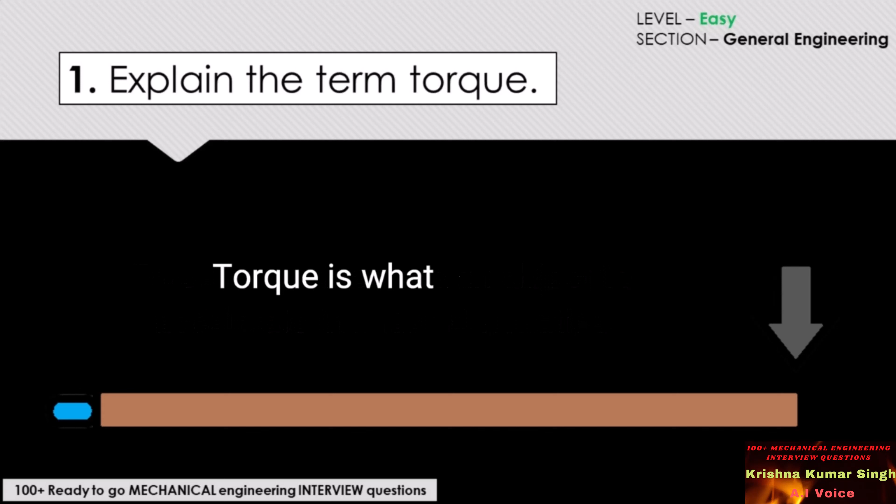Explain the term torque. Torque is the measure of the force that can cause an object to rotate about an axis. Force is what causes an object to accelerate in linear kinematics. Similarly, torque is what causes an angular acceleration. Hence, torque can be defined as the rotational equivalent of linear force.

The perfect answer for this particular question would be: a force that causes rotation is called torque. It is a measure of how much force is required to rotate an object.

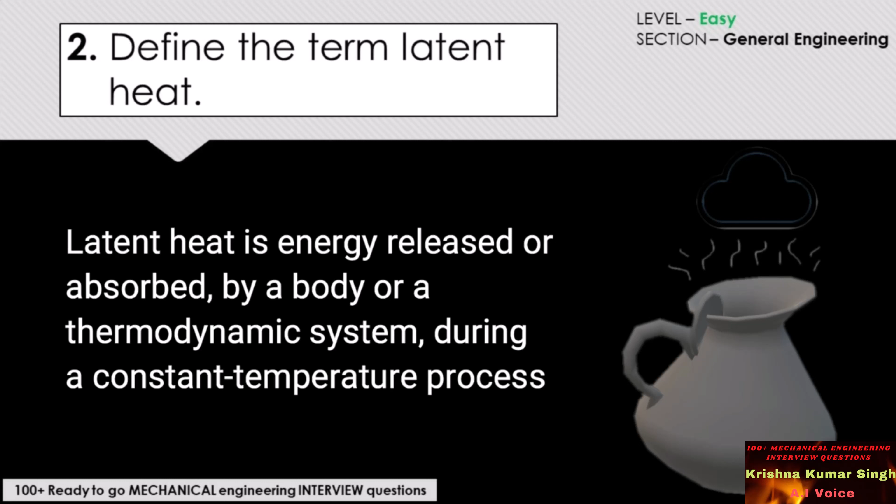Define the term latent heat. Latent heat, which is also known as latent energy or heat of transformation, is the energy released or absorbed by a body or a thermodynamic system during a constant temperature process or an isothermal process. The perfect answer for this particular question would be: it is an amount of heat that changes the property of material without increasing its temperature any further.

What do you understand by dimensional analysis? In engineering and science, dimensional analysis is the analysis of the relationships between different physical quantities by identifying their base quantities and units of measure and tracking these dimensions as calculations or comparisons are performed.

The perfect answer for this question would be: dimensional analysis is the mathematics of dimensions and quantities and provides procedural techniques whereby the variables that are assumed to be significant in a problem can be formed into dimensionless parameters, the number of parameters being less than the number of variables.

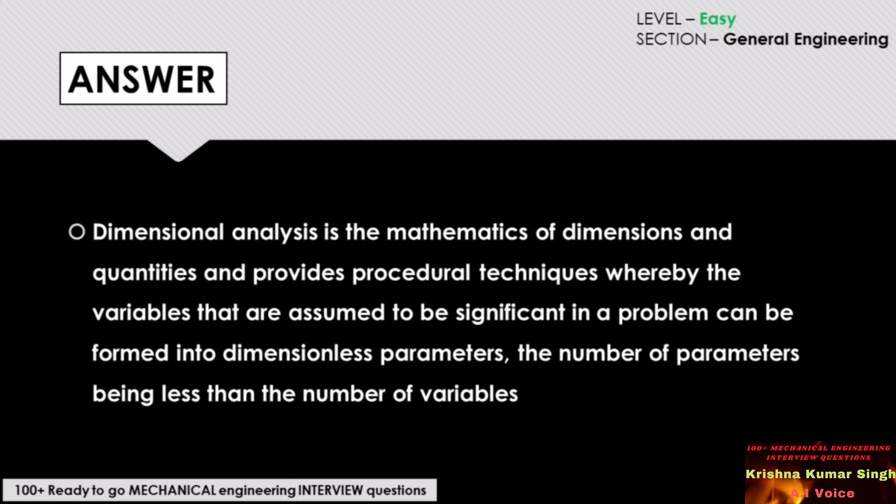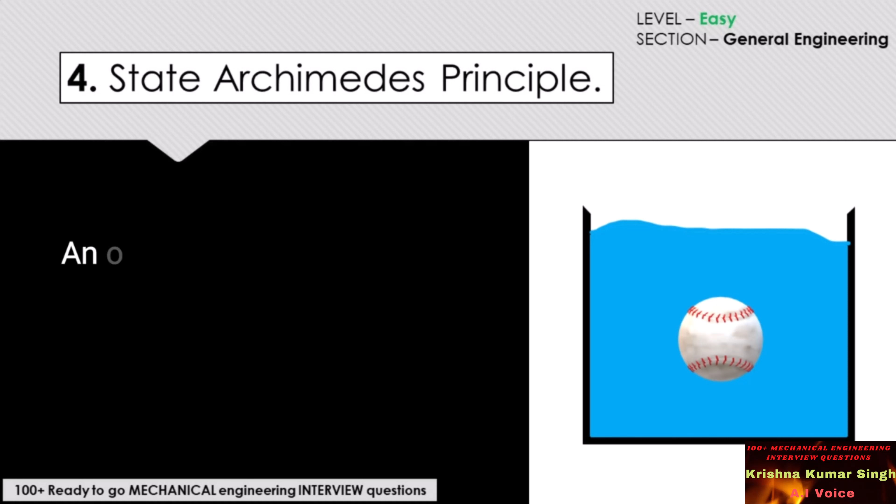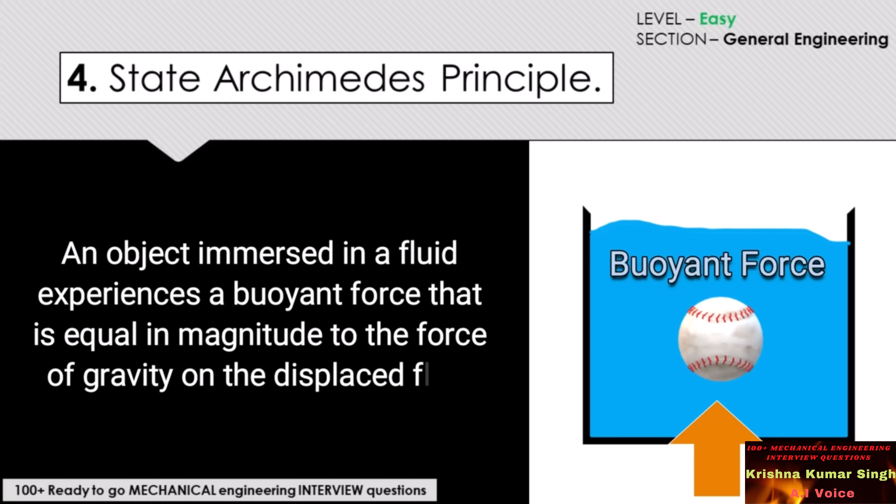State Archimedes' principle. Archimedes' principle states that an object immersed in a fluid experiences a buoyant force that is equal in magnitude to the force of gravity on the displaced fluid. The perfect answer for this particular question would be: any weight floating or immersed in a liquid is acted upon by a buoyant force equal to the weight of the liquid displaced. This force acts through the center of buoyancy of the displaced liquid.

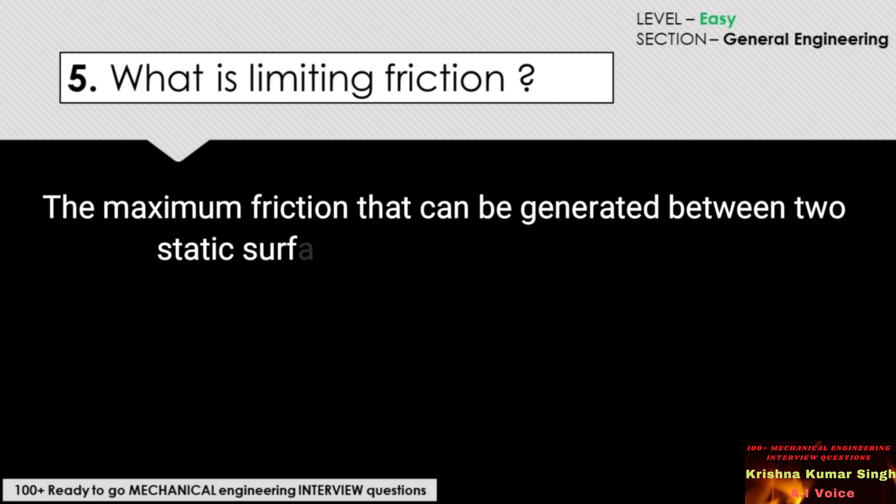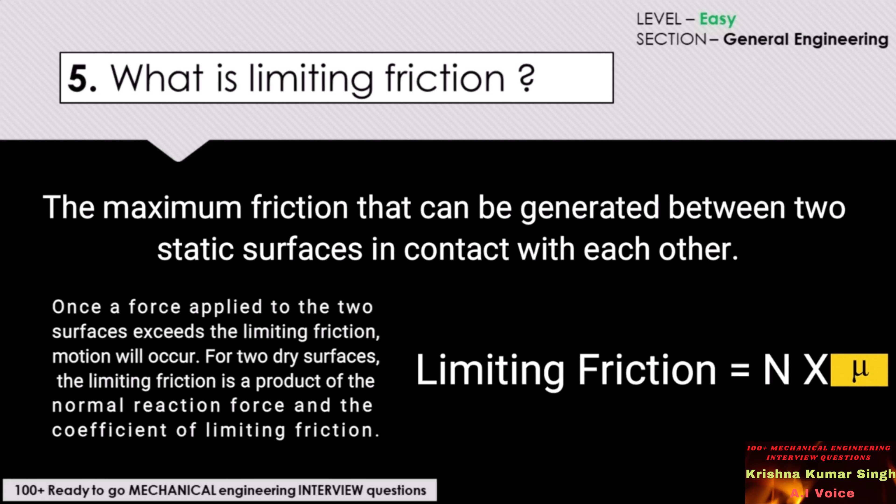What is limiting friction? The maximum friction that can be generated between two static surfaces in contact with each other is what we call limiting friction. Once a force applied to the two surfaces exceeds the limiting friction, motion will occur. For two dry surfaces, the limiting friction is a product of the normal reaction force and the coefficient of limiting friction.

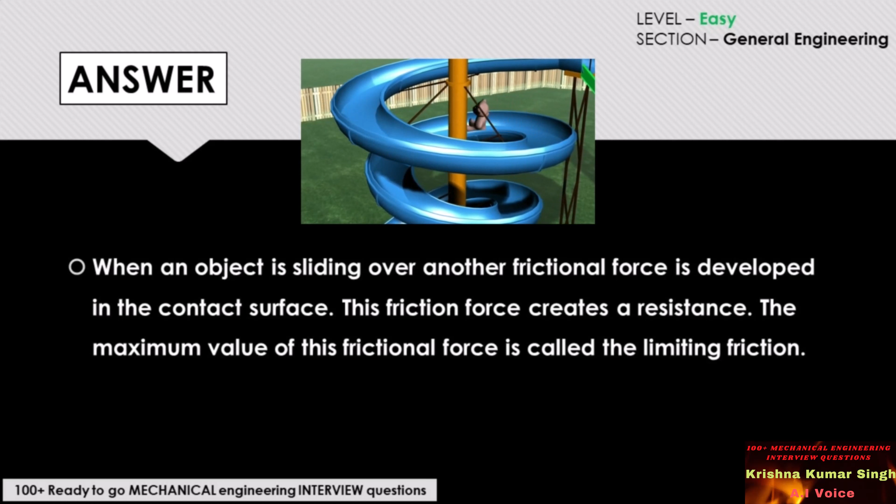The perfect answer for this particular question would be: when an object is sliding over another object, frictional force is developed in the contact surface. This friction force creates a resistance. The maximum value of this particular frictional force is called the limiting friction.

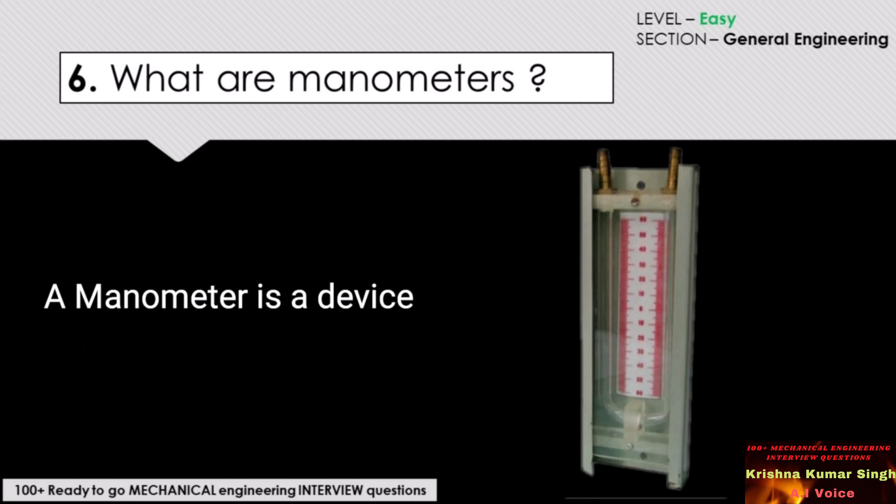What are manometers? A manometer is a device to measure pressure. The perfect answer for this particular question would be: they are pressure measuring devices for liquids. To measure the pressure at a point in the liquid, a manometer balances a liquid column.

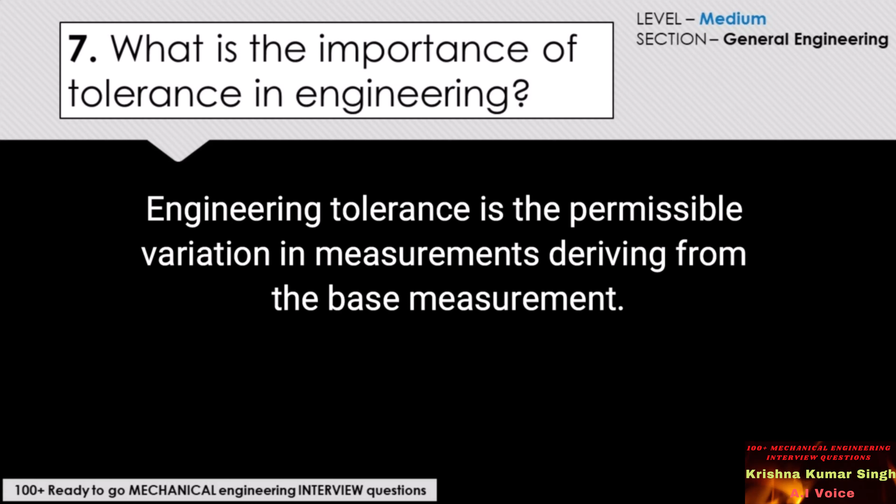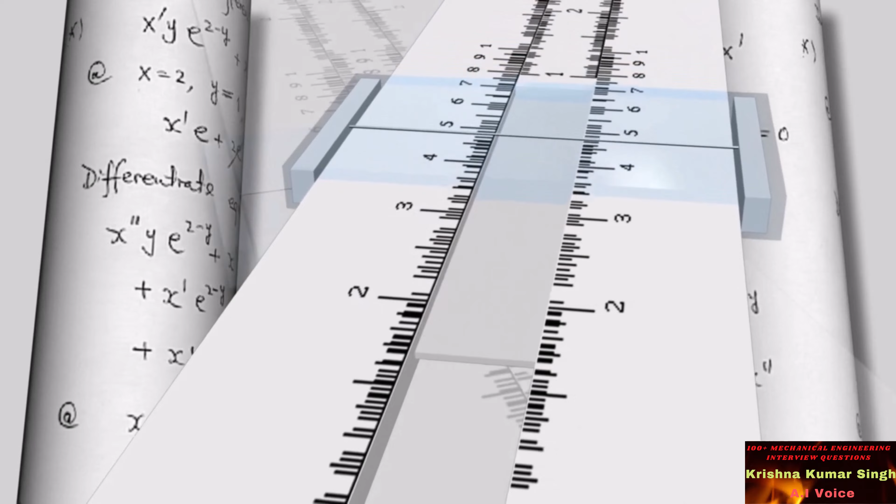What is the importance of tolerance in engineering? Engineering tolerance is the permissible variation in measurements deriving from the base measurements. The perfect answer for this particular question would be: you cannot design any product without tolerance. It increases the chances of rejection rate and overall product cost. You utilize tolerance in part dimension to reduce cost and facilitate the manufacturer.

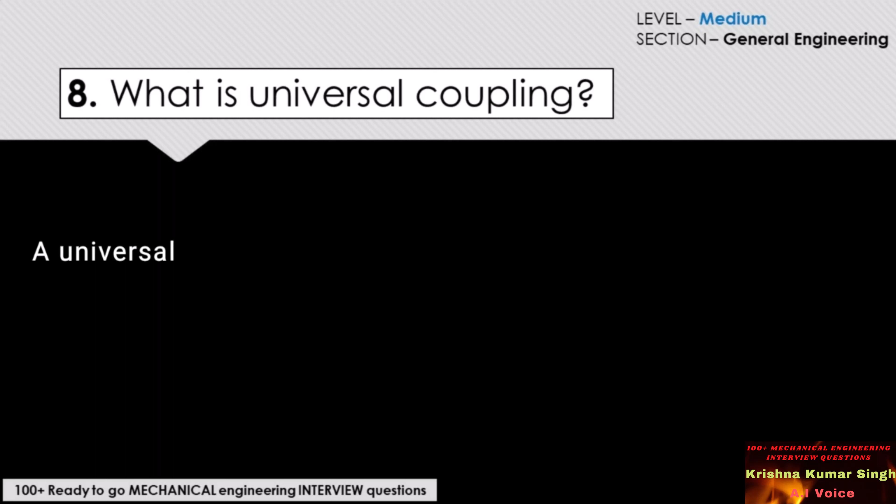What is a universal coupling? A universal joint is a joint or coupling connecting rigid rods whose axes are inclined to each other and is commonly used in shafts that transmit rotary motion. It consists of a pair of hinges located close together, oriented at 90 degrees to each other, connected by a cross shaft.

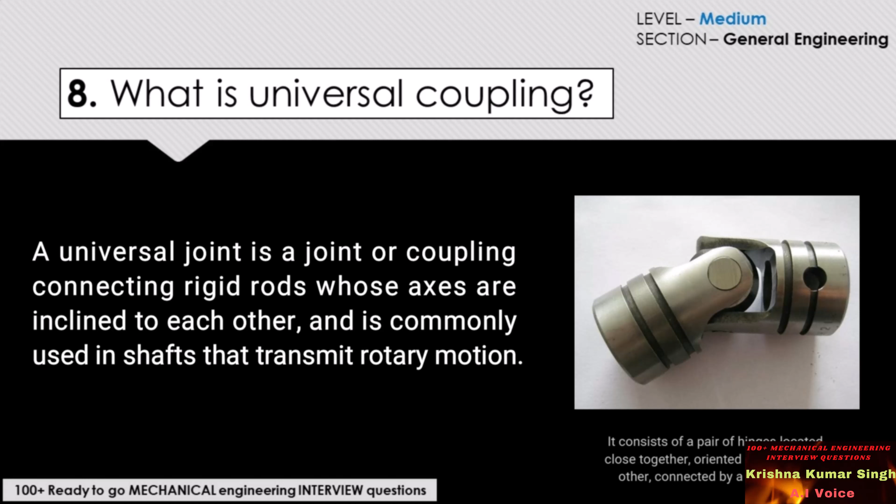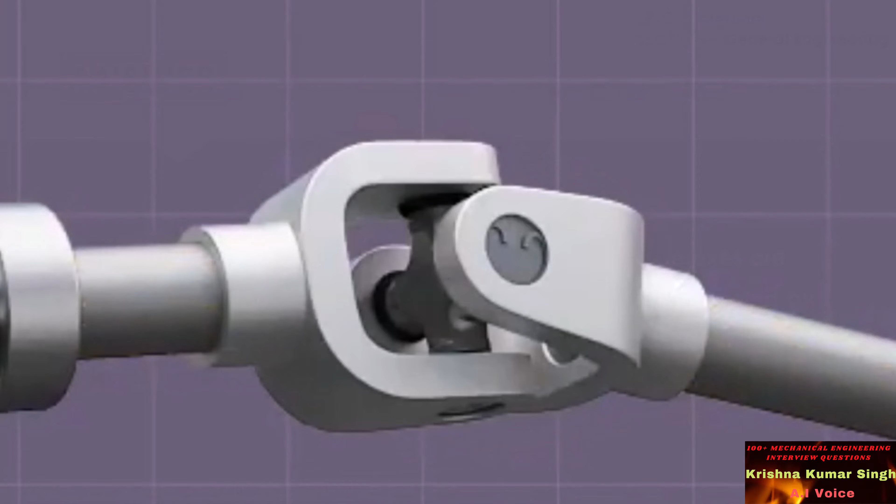So the answer for this particular question would be: universal coupling is used to connect two shafts whose axes are inclined to each other. It consists of a pair of hinges connected by a cross shaft.

What does angular momentum mean? In physics, angular momentum is the rotational equivalent of linear momentum. It is an important quantity in physics because it is a conserved quantity. The total angular momentum of a closed system remains constant. And this is what the conservation of angular momentum theory is.

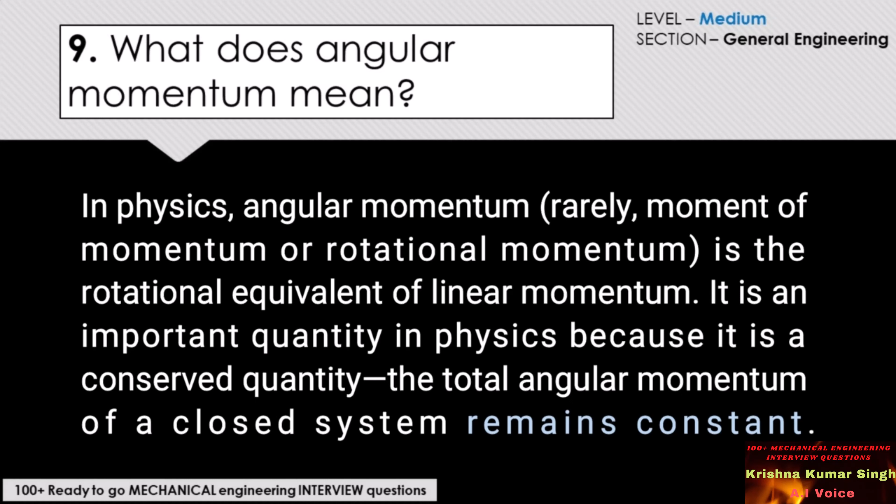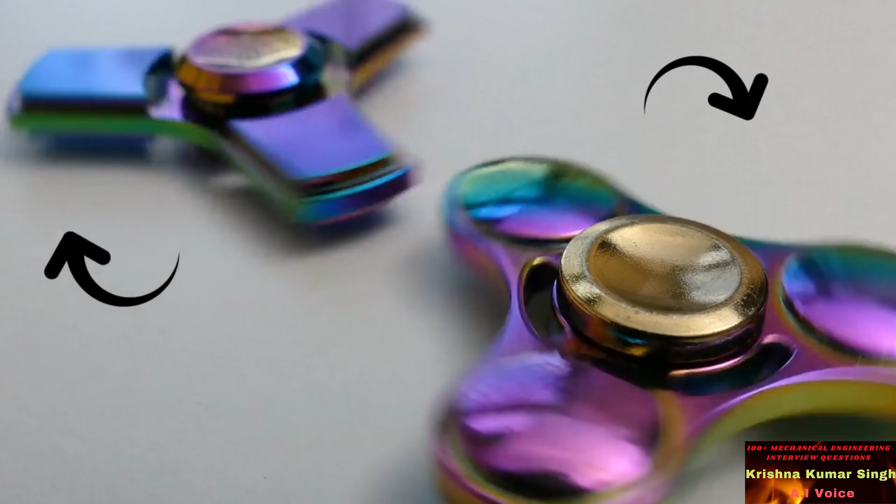So the answer to this particular question would be: angular momentum is an expression of an object's mass and rotational speed. Momentum is the velocity of an object times its mass, or how fast something is moving and how much it weighs. Therefore, angular momentum is the object's mass times the angular velocity, where angular velocity is how fast something is rotating, expressed in terms like RPM or RPS, revolutions per minute or revolutions per second.

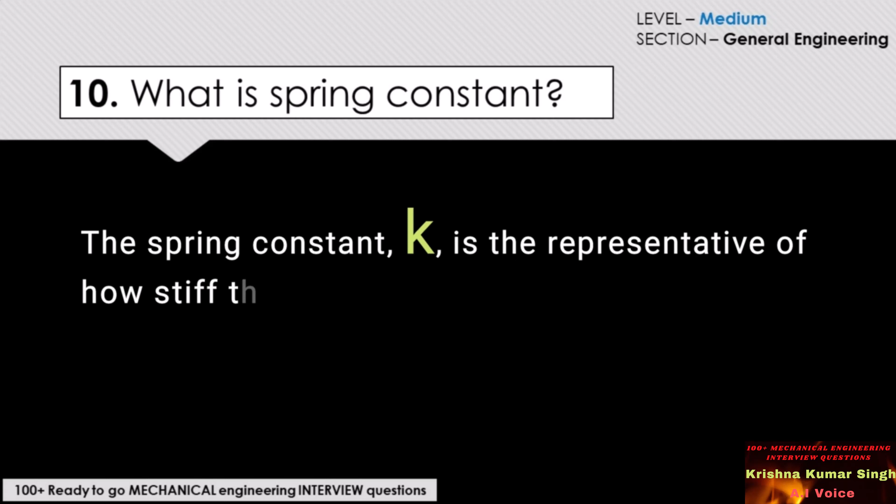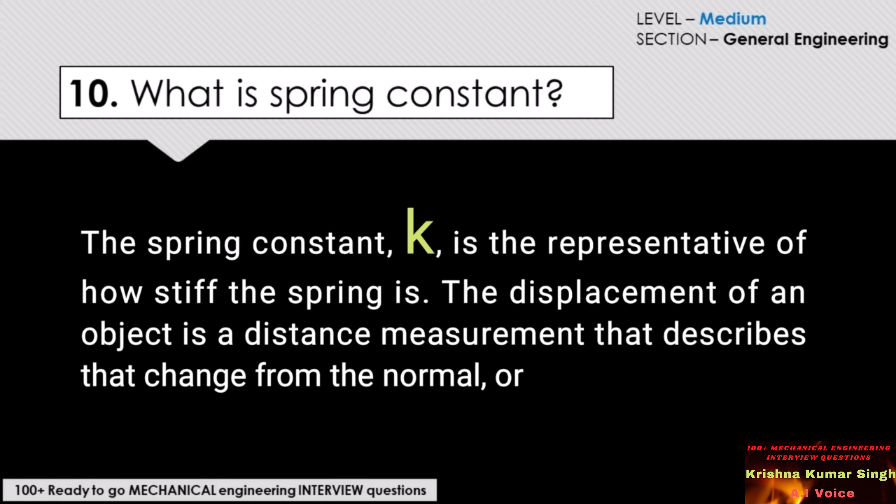What is spring constant? The spring constant, which is denoted by K, is the representative of how stiff the spring is. The displacement of an object is a distance measurement that describes that change from the normal or equilibrium position.

The perfect answer for this question would be: spring constant, which is denoted by K, is given by K = -F/X. Here F is the force and X is the displacement. The unit of the spring constant is Newton per meter. Every spring has its own spring constant, which is a measure of its stiffness and strength.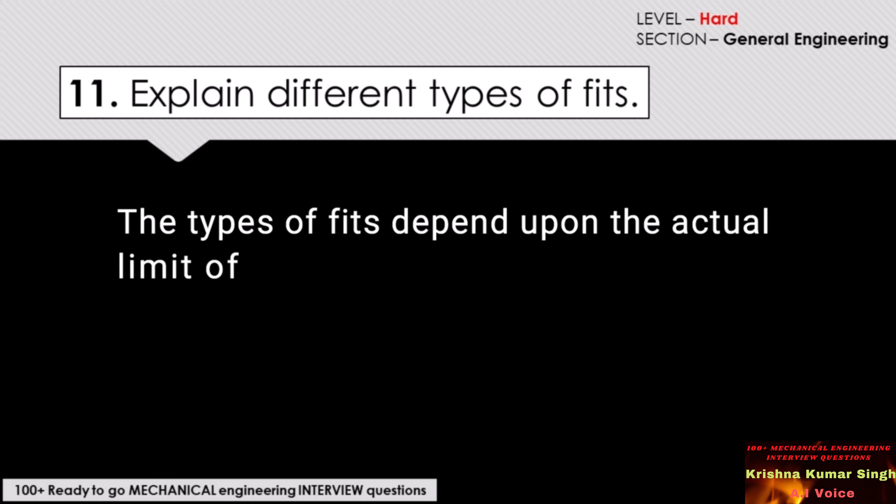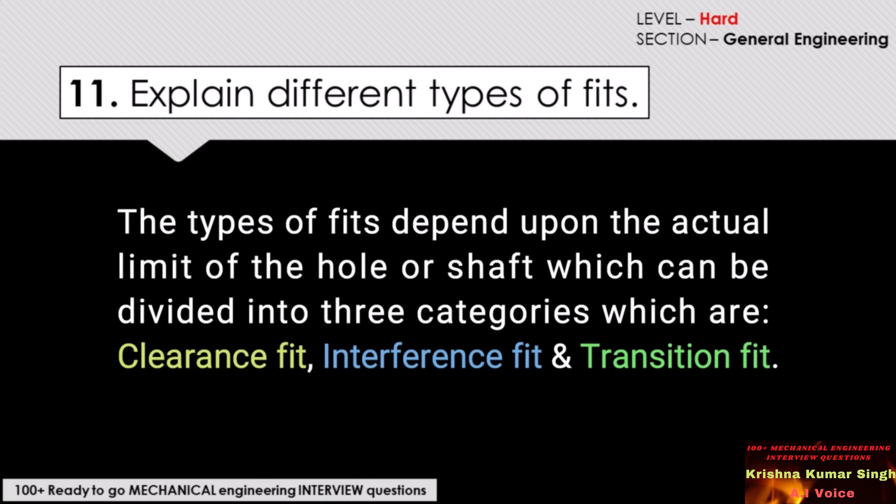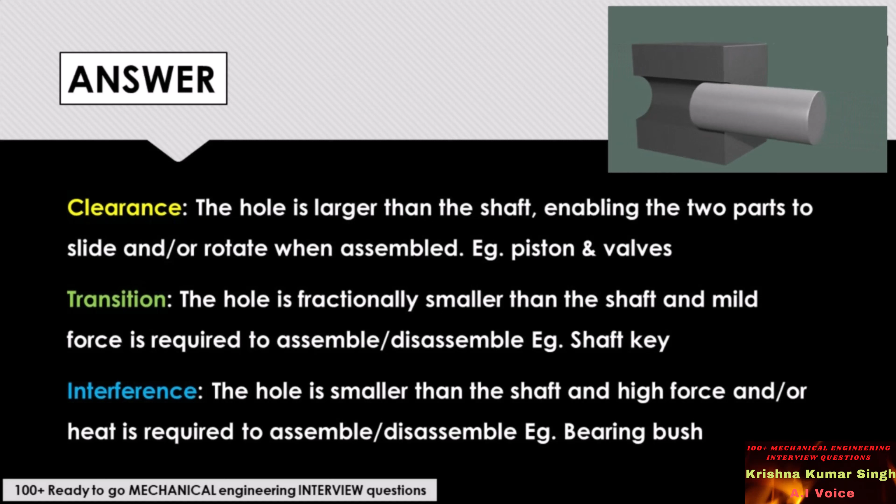Explain different types of fits. The types of fits depend upon the actual limit of the hole or shaft. This can be divided into three categories: clearance fit, interference fit, and transition fit. So the answer for this question would be, there are three categories of fits. First is clearance fit. In this kind of fit, the hole is larger than the shaft, enabling the two parts to slide or rotate when assembled. The example for such kind of fit would be pistons and valves.

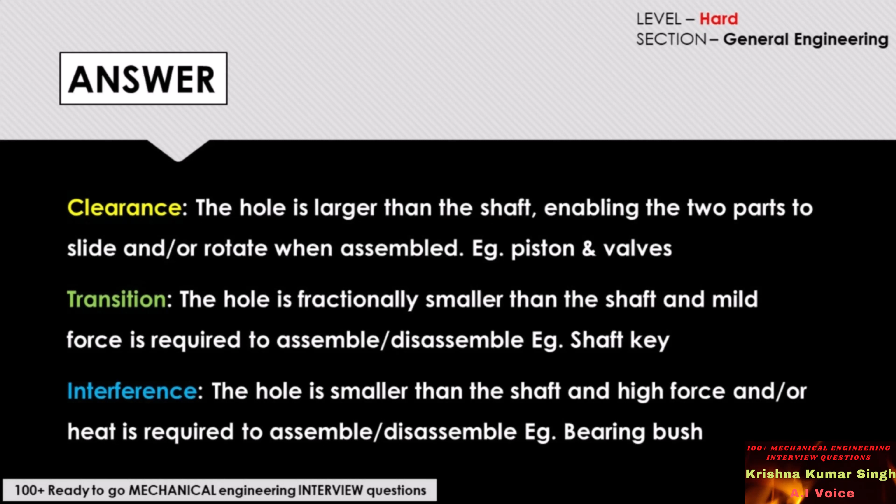Another kind of fit is the transition fit. Here the hole is fractionally smaller than the shaft, and mild force is required to assemble or disassemble. The example of such kind of fit would be a shaft key. And last but not the least, we have interference fit. Here the hole is smaller than the shaft, and high force or heat is required to assemble or disassemble. The example of such interference fit would be a bearing bush.

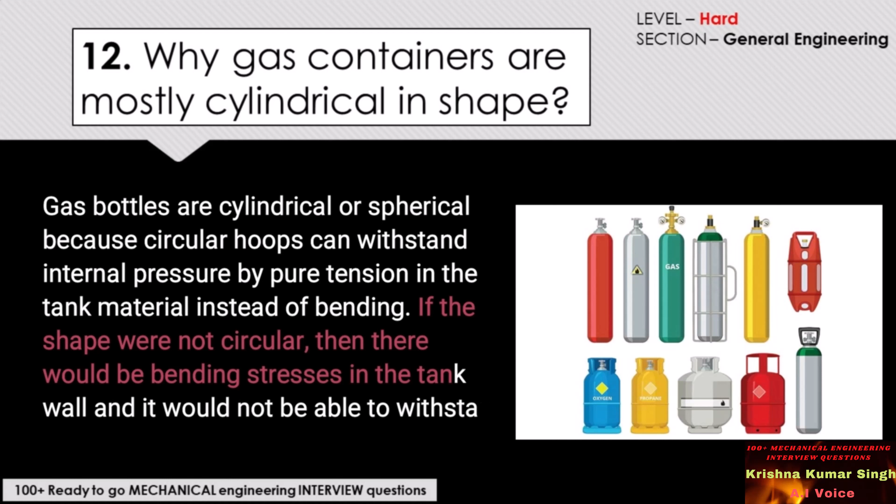Why are gas containers mostly cylindrical in shape? Gas bottles are cylindrical or spherical because circular hoops can withstand internal pressure by pure tension present in the tank material. If the shape were not circular, then there would be bending stresses in the tank wall and it would not be able to withstand as much pressure without breaking.

The answer for this particular question would be, the most efficient shape for withstanding high pressure is a sphere, which would be costly to manufacture. A cylinder with a domed top and bottom is a much cheaper shape to manufacture, while still having good strength to resist the internal gas pressure.